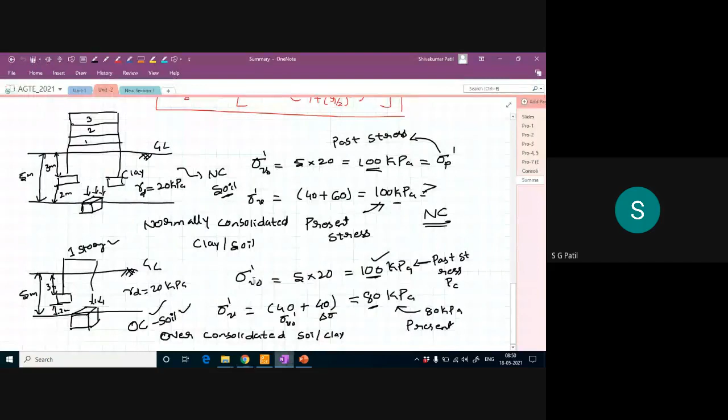So before solving, I want to summarize this consolidation settlement. So I will add here: summary of consolidation settlement. So yesterday, what we saw to calculate this consolidation settlement, what are the things we need?

First and foremost thing is you should have these compressibility parameters. Once you have compressibility parameters, then I can calculate this consolidation settlement. So wait a minute. So first we have seen these compressibility parameters.

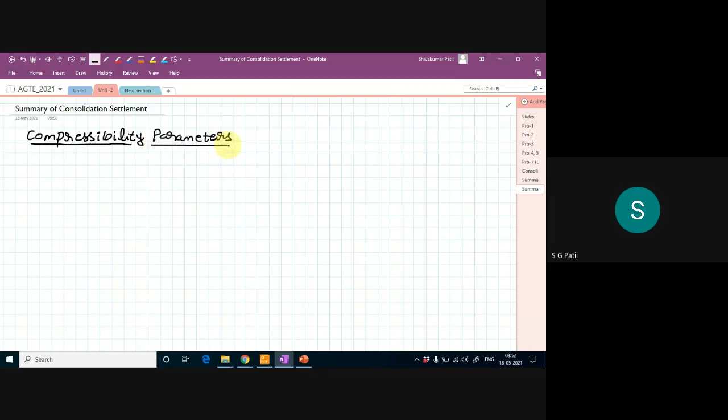Compressibility parameters. What are those compressibility parameters? Can anybody tell me? First one is your coefficient of compressibility.

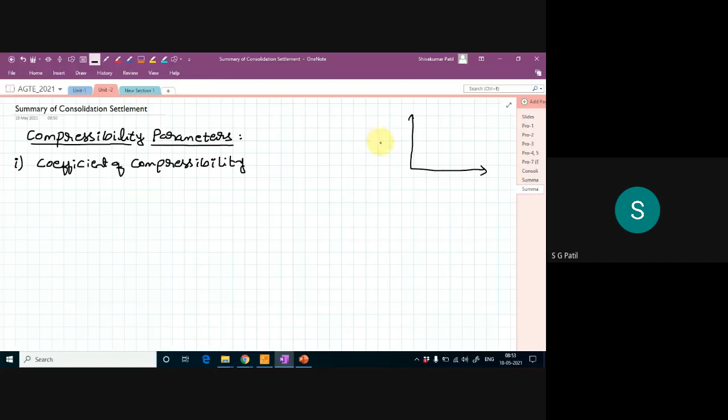So how we found out this coefficient of compressibility? If you draw a graph between your void ratio, that is E, versus your effective stress, if you plot a graph between void ratio versus effective stress, I will get something like this curve. So the slope of this virgin compression line will be my AV. So AV is equal to, what is the formula? Delta E by delta sigma dash, that is change in void ratio with respect to change in effective stress.

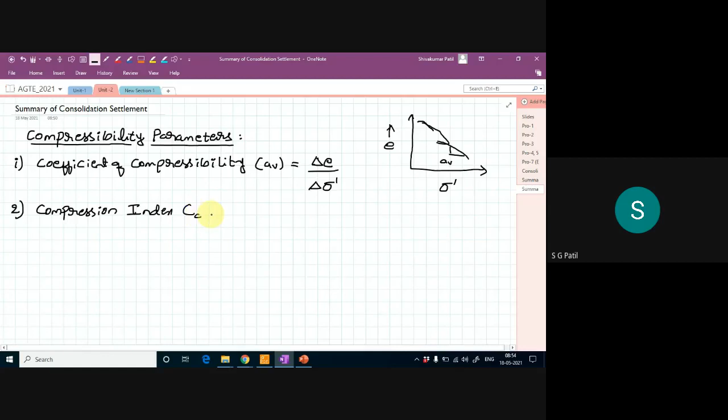So then what is the second parameter we have seen? Compression index, that is CC. How we got this CC value? If I plot the same E versus sigma plot but in logarithmic scale, so this is E and log of sigma dash, okay, now this whatever curving nature is there becomes a straight line like this.

So the slope of this line, virgin compression line, is the CC value. This CC is nothing but the change in void ratio divided by the change in effective stress, logarithmic scale in terms of logarithm, so log of sigma 2 dash by sigma 1 dash. So this is compression index. Then what is the third term?

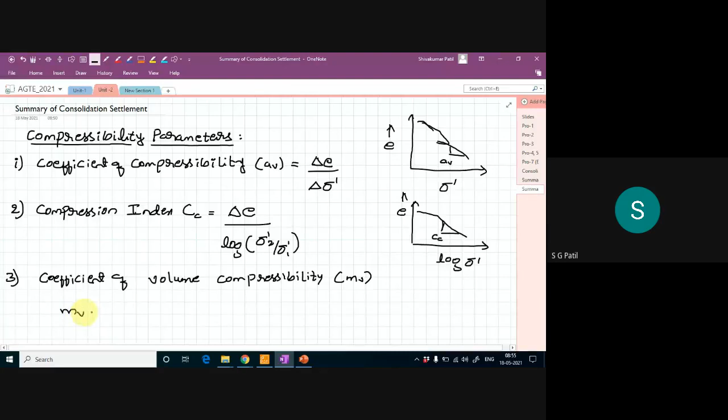Coefficient of volume compressibility. What is the symbol? Coefficient of volume compressibility, it is MV, right? So your MV is equal to what? Your volumetric strain divided by change in stress, change in effective stress. Very good. So change in effective stress.

So that is nothing but your delta V divided by V, which is your volumetric strain, divided by delta sigma dash, which is my change in effective stress. So this can be written in terms of unit height also, because since I am considering it as 1D consolidation, your volume changes in only one direction, that is H direction, because other two dimensions are unit. So that is delta H by H divided by delta sigma.

So I have a relation between your coefficient of volume compressibility and coefficient of compressibility. What is that? So my MV also can be written as AV divided by 1 plus E naught. This also I can write.

And what is the fourth parameter we have seen? What is that? Coefficient of recompression, yes, recompression index. Coefficient of, or only recompression index also you can write. Recompression index.

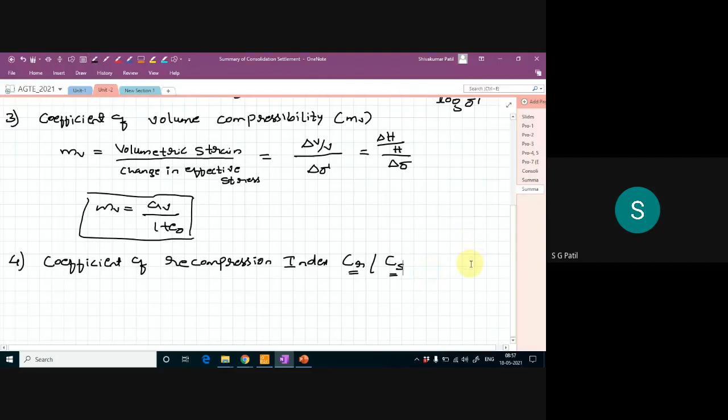So what is the symbol? CR, or in some textbooks CS, coefficient of swelling index - the recompression index, CR or CS, whatever you want. This is nothing but the slope of the recompression line. This is the recompression line and this is the virgin compression line. If I take the slope of this line, then this is my CR, which is delta E by log of sigma 2 dash by sigma 1 dash, but it should be taken in the range of the recompression line.

So whenever I am talking about compression index, you should take it in the VCL, the virgin compression line. This is the recompression line.

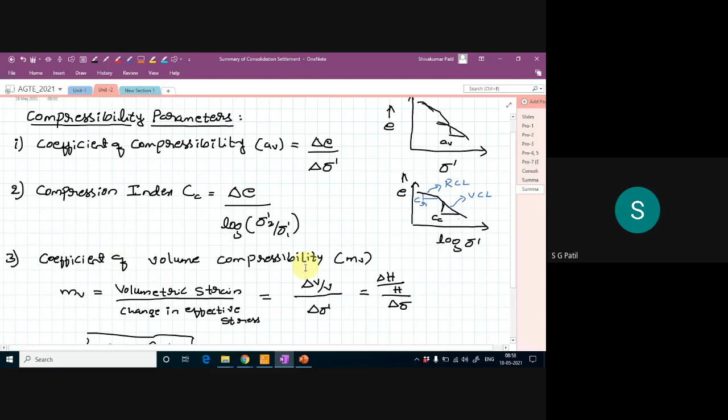Once I have all these compression indexes, the next thing is I should know whether the soil is normally consolidated or over consolidated. So some important terminologies I should remember. What is the first one?

Normally consolidated clay or soil. What is the abbreviation? NC. Can anyone tell me what is normally consolidated soil? If the OCR is equal to 1, then I can call it normally consolidated. This is one way of defining normally consolidated.

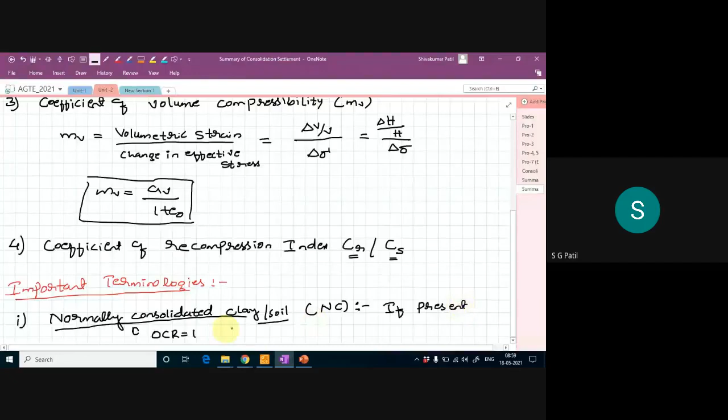But what is the other way? If the present effective overburden stress is the maximum pressure that soil has been subjected to in its geological history - that means whatever present load is there, that itself is the maximum pressure it has ever seen - those kinds of soils are called normally consolidated soil.

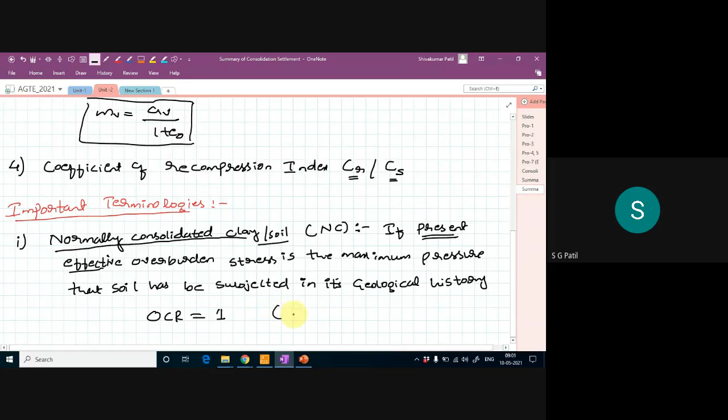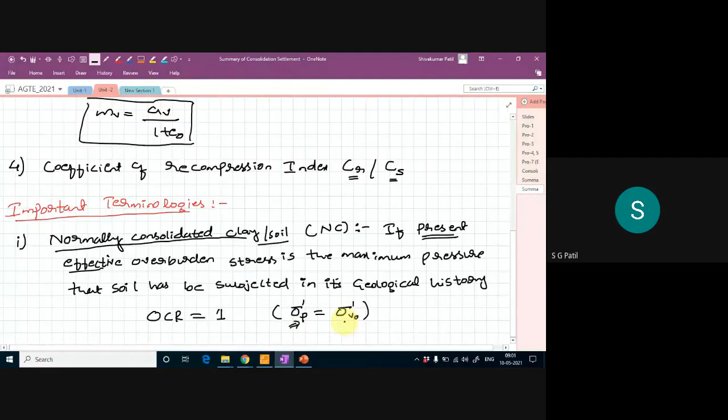So if I want to define it in terms of over consolidation ratio, OCR, then if my OCR is equal to 1, the soil is called normally consolidated. This is nothing but pre-consolidation stress equal to present vertical stress. If that is the case, then the soil can be called normally consolidated soil.

These normally consolidated soils undergo relatively larger settlement. Why am I using the term relatively? It is relative compared to the OC soil. So what is the second definition? That is over consolidated soil.

Over consolidated soil, symbol OC soil. How can I define over consolidated soil? Tell me.

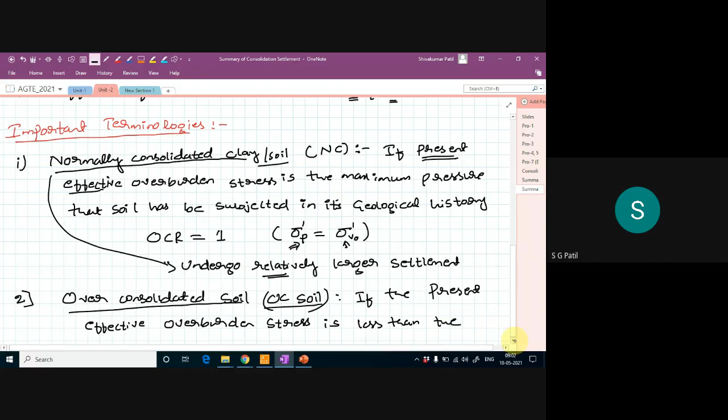If the present effective overburden stress is less than the stress which the soil experienced in its past geological history - if I want to define it in terms of OCR ratio, OCR is greater than 1 - then also I can call this over consolidated soil.

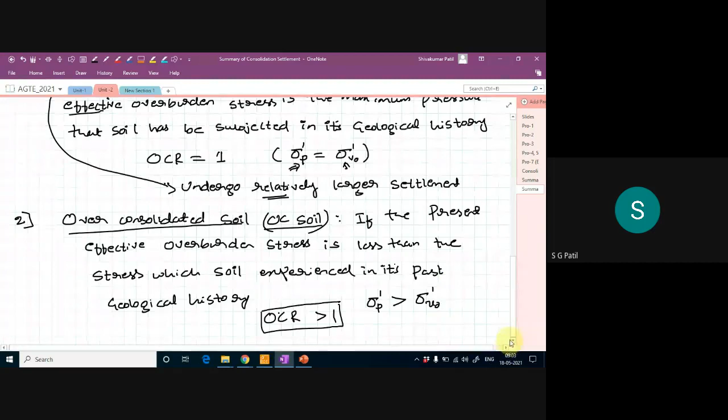That means your pre-consolidation stress is greater than your present vertical stress. Now what is OCR? OCR is nothing but the ratio of pre-consolidation stress to the present vertical stress.

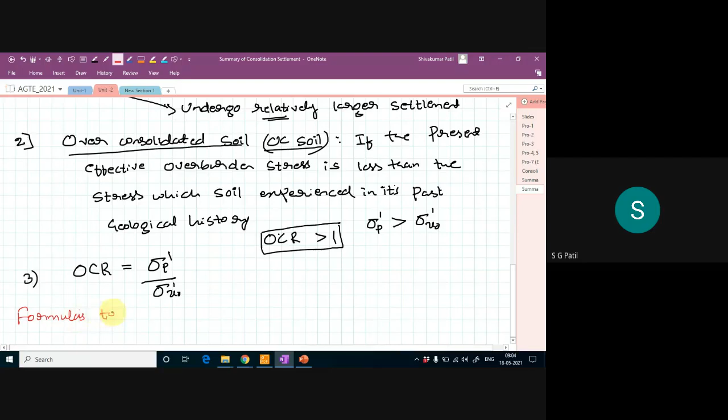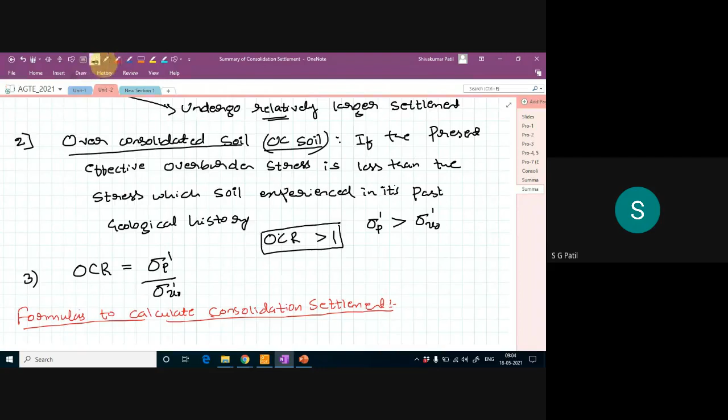So then we have seen some formulas to calculate this consolidation settlement. What is the basic formula? First, tell me. That is delta H by H naught is equal to delta E by 1 plus E naught.

So delta H is nothing but my consolidation settlement, SC. So SC is equal to H naught divided by 1 plus E naught, into delta E. This is the first equation which I can use to calculate the consolidation settlement. What is the second equation?

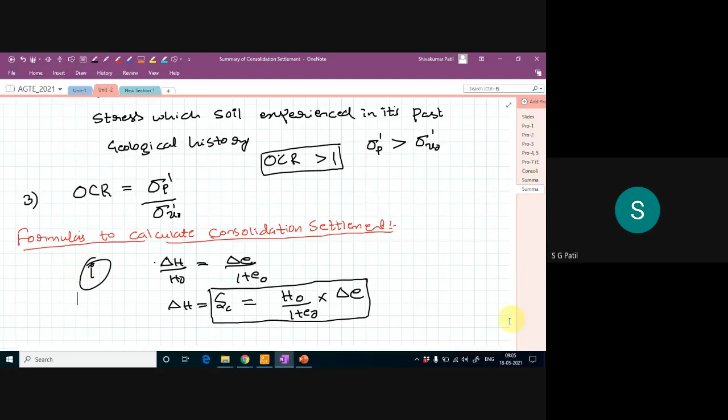So I can use AV. What is AV? AV is nothing but coefficient of compressibility. What after all is AV? AV is nothing but change in void's ratio to the change in effective stress.

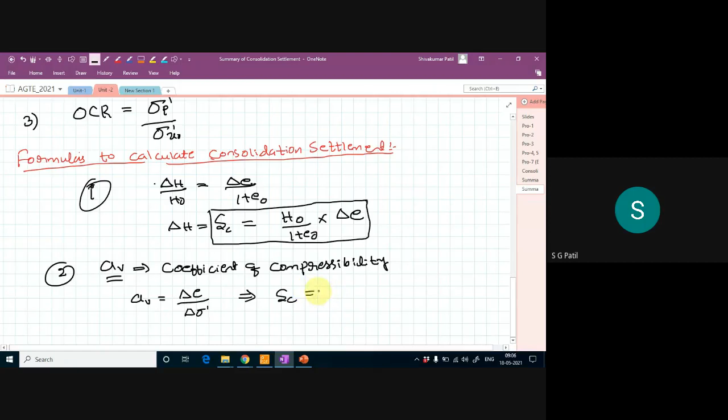Now you put this equation here - wherever delta E is there, you put AV into delta sigma. So my SC becomes AV divided by 1 plus E naught, into delta sigma dash, into H naught. This is my second formula. If in the problem they give the AV value, then you should use this equation.

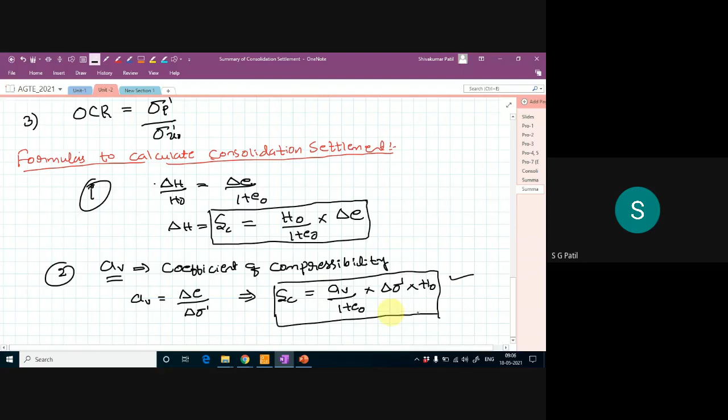Then there is another formula using MV. What is MV? MV is nothing but coefficient of volume compressibility. MV is equal to AV divided by 1 plus E naught - you put it in this equation, so AV by 1 plus E naught is nothing but my MV. So SC is MV into delta sigma dash, into H naught. This is my third equation to calculate consolidation settlement. If in the problem they give you the volume compressibility, you should use this equation.

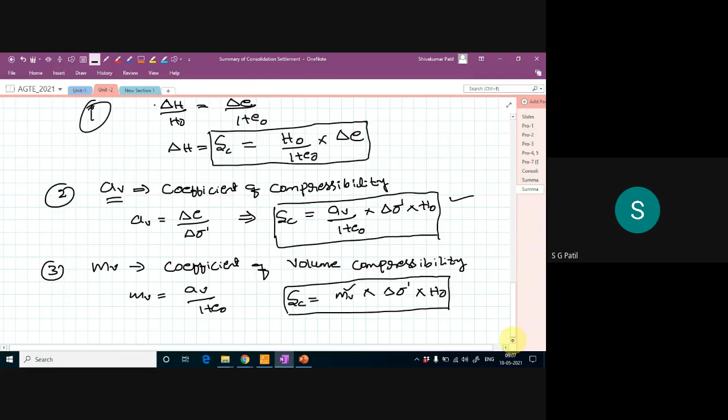Now, what is the fourth way to calculate the consolidation settlement? By using the compression index, that is CC.

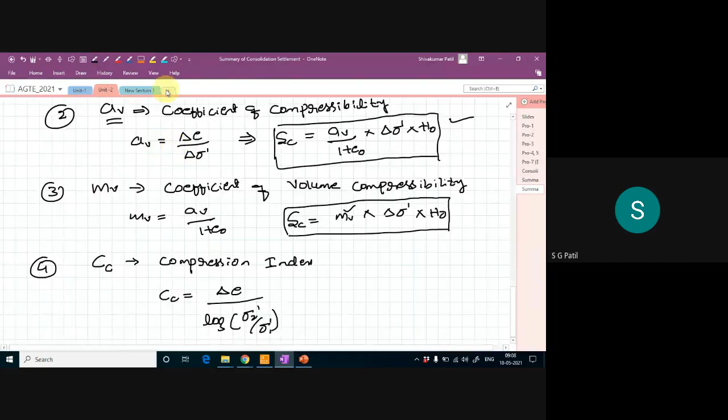Compression index. So what is CC? CC is nothing but delta E divided by log of sigma 2 dash by sigma 1 dash. Now if I put this delta E into this equation, in place of delta E, if I put Cc into log of sigma 2 by sigma 1 dash, then I will get the fourth equation.

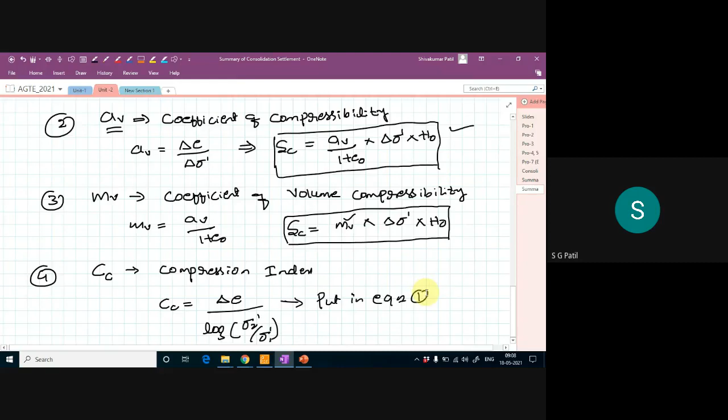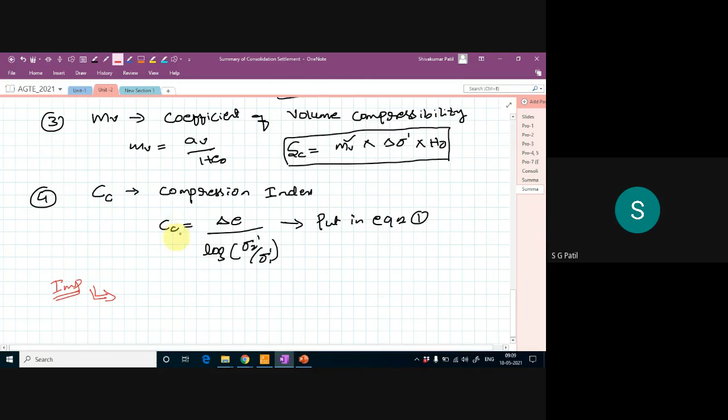So let me put this in equation number 1. If you put this in, then I will get the formula. This is a very important formula, so I will write it in red. Almost 99% of problems will be asked based on giving you the CC value. So if you forget other formulas, that is fine, but you should not forget this one.

This is very important. So Sc is equal to H naught divided by 1 plus e naught into Cc into log of sigma 2 dash by sigma 1 dash.

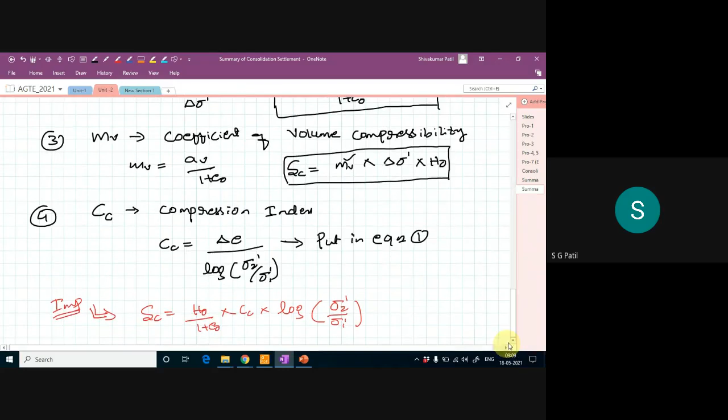What is sigma 1 dash? Sigma 1 dash is nothing but your sigma V naught, that is the present vertical stress. So H naught is the thickness of the clay layer.

And sigma 2 dash is nothing but your present vertical stress plus change in effective stress, that is delta sigma Z. This is the change in effective stress because of your foundation. Anyway, sigma V naught is nothing but your present vertical or overburden stress, or present effective stress also I can call that.

So this is an important formula, you should remember always.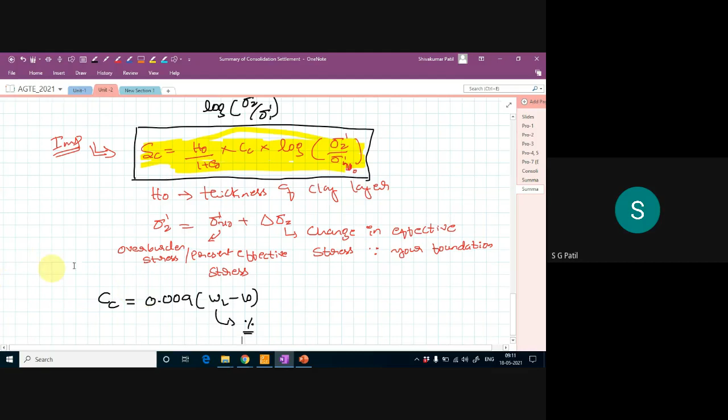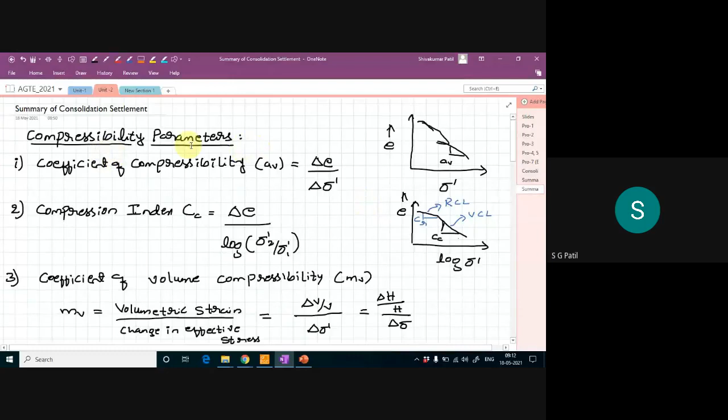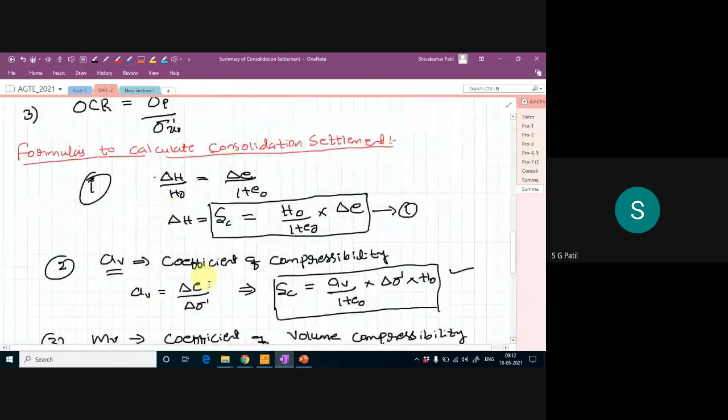So this is what we have seen till now in our consolidation settlement chapter. The important takeaway from this discussion is the definitions of these compressibility parameters, then what is NC, what is OC, and what is OCR, and how to calculate the consolidation settlement. There are 4 ways to calculate consolidation settlement, but this 4th one is very important, almost 99% of your problems are based on this formula.

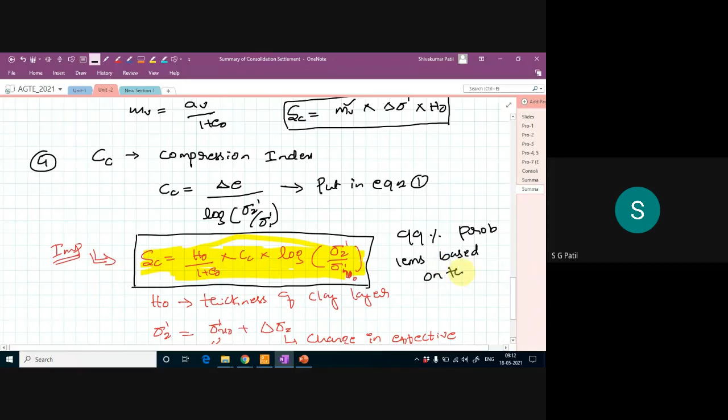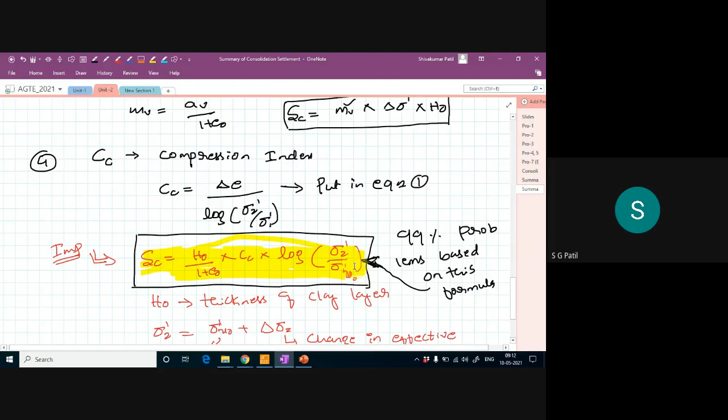Okay, so coming back to that problem I was talking about, let me solve this problem.

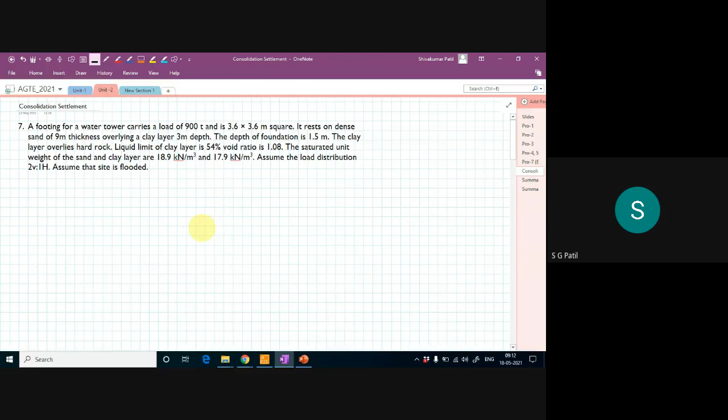So what they're telling: a footing of a water tower carries around 900 tonnes, 3.6 meter by 3.6 meter square. It rests on dense sand of 9 meter thickness overlying a clay layer. So dense sand is overlying the clay layer. This is my foundation.

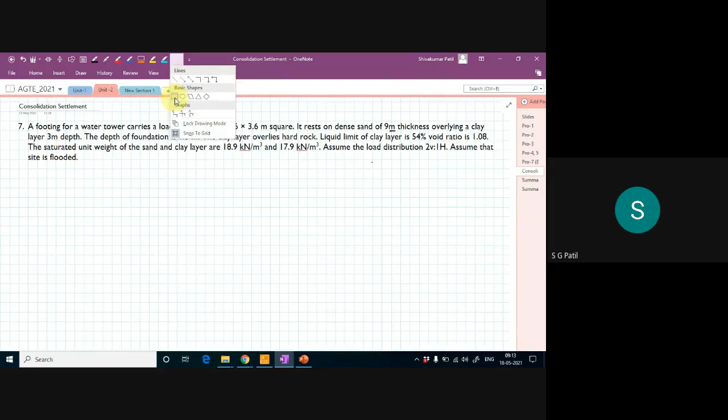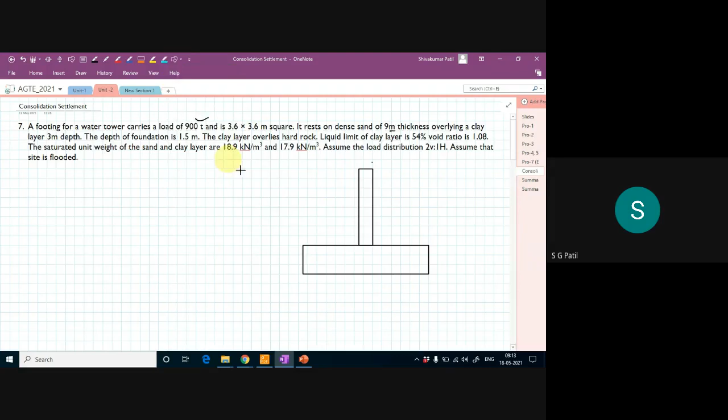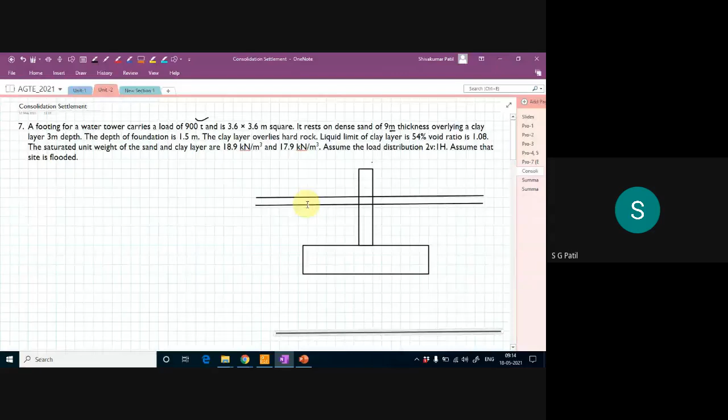This is my ground level.

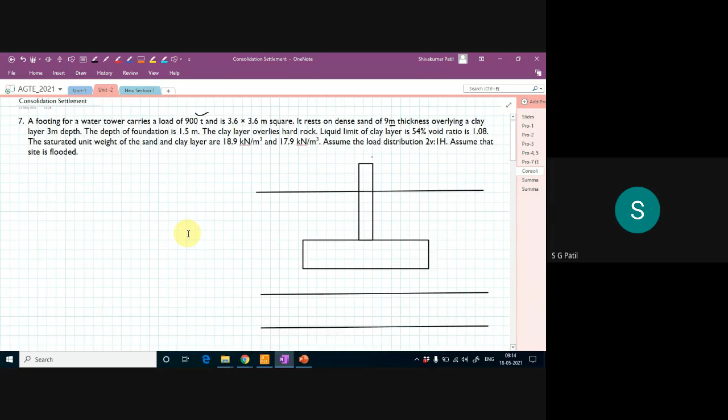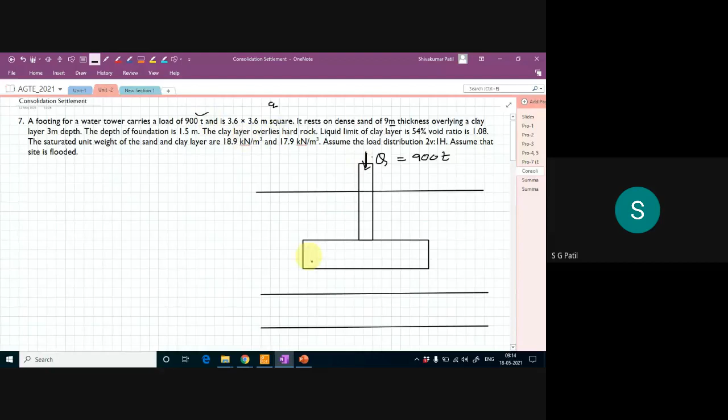So how much load is applied? That is capital Q. See, they've given it in terms of weight, not stress. If they had given it in terms of stress, that would be a small q. Here they've given weight, so capital Q is equal to 900 ton, and the size of the footing is 3.6 by 3.6 meter.

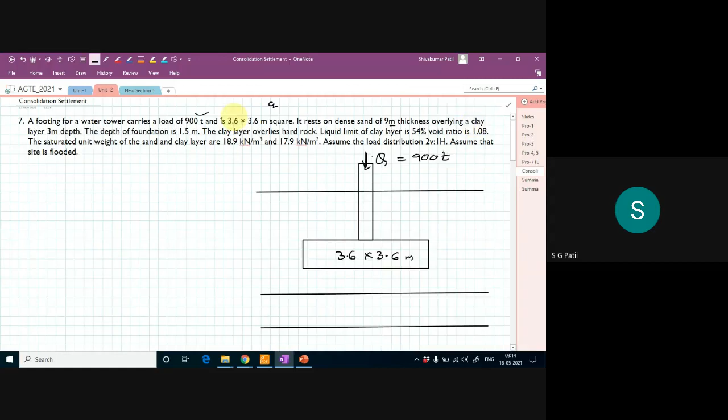So it rests on dense sand of 9 meter thickness overlying a clay layer of 3 meter depth. So this is the clay layer, with a depth of 3 meter. And the thickness of the sand layer is 9 meter thick.

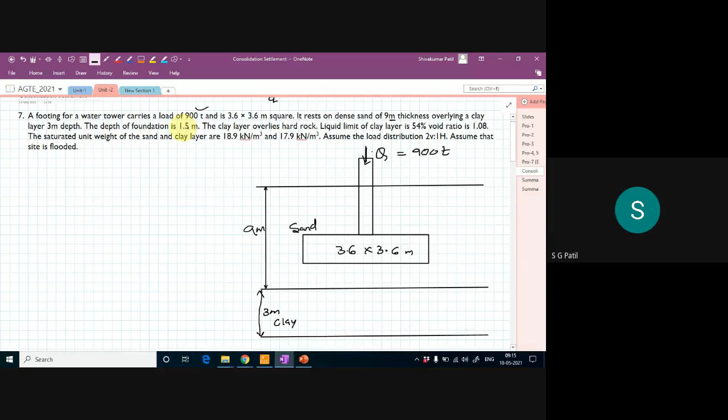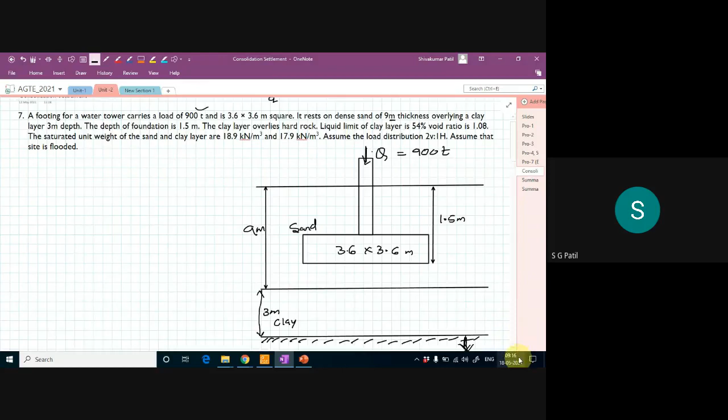The depth of foundation is 1.5 meter. The clay layer overlies the hard rock, so here there is a hard rock.

So the liquid limit of clay is 54%, sometimes I will write LL, which is nothing but your WL. The void ratio is how much? That is the initial void ratio only, 1.08. The saturated unit weights of sand and clay are given, and the groundwater table is here.

So gamma sat of sand layer is 18.9 kilonewton per meter cube. And what is the unit weight of the clay layer? That is 17.9 kilonewton per meter cube. So this is where I should write it, gamma sat, how much?

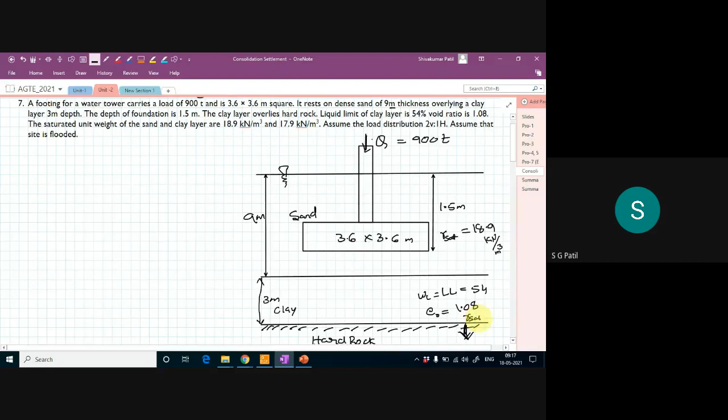Gamma sat of clay is 17.9 kilonewton per meter cube. Assume the load distribution is 2 vertical to 1 horizontal, and assume that the site is flooded, meaning the groundwater table is at the ground level. So this is my ground level. Now let us solve this problem.

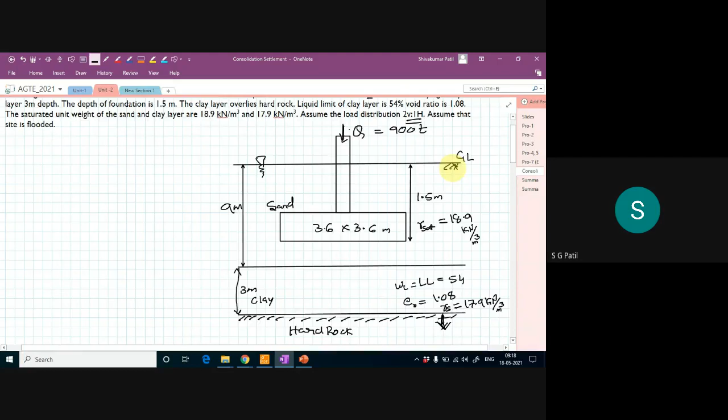How can we start? First write down the formula we should use to find the consolidation settlement. SC is equal to H naught divided by 1 plus E naught, into CC, into log of sigma 2 dash by sigma V naught dash.

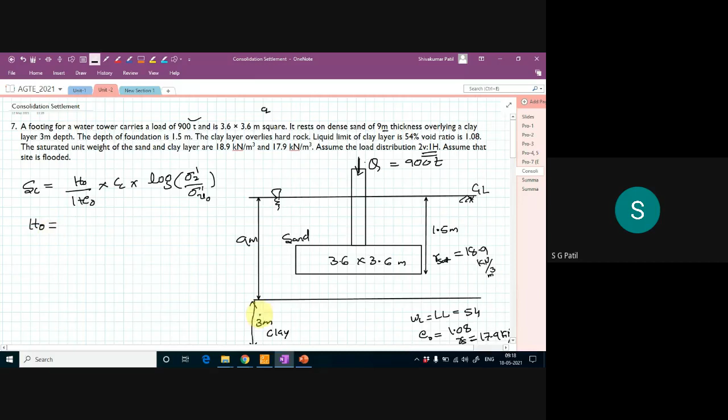So what is my H naught here? What is the thickness of the clay layer? 3 meter, so H naught is 3 meter. And what is my E naught? They've given E naught equal to 1.08. And what is CC? CC I should find out.

CC is equal to 0.009 into liquid limit minus 10. What is the liquid limit given? 54%. 54 minus 10, how much? CC, how much are you getting? 39.6, so 0.396.

You should put it in percentage only. Don't convert it into decimal, because this formula is given by Skempton, a scientist. He has given this formula using the liquid limit in percentage only. So that's why I should put my liquid limit in percentage. So this is my CC value.

So this I got, this I got, this I got. Then what is my sigma 2? Before that, I will calculate sigma V naught dash at the center of the clay layer. Let me draw a center line here.

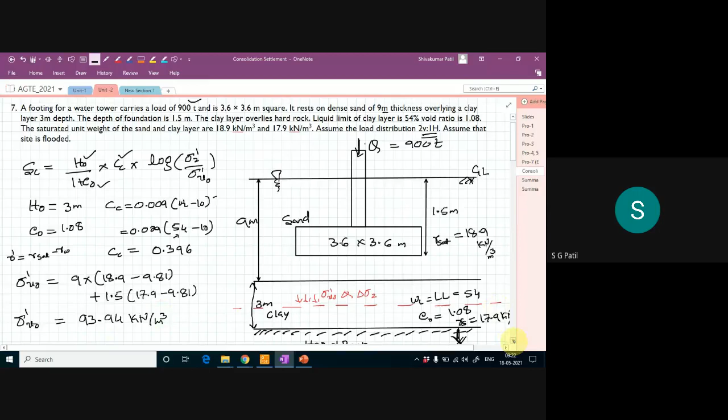Tell me how much you are getting for sigma V naught dash. 93.94 kilonewton per meter cube. Okay, very good.

So next, what next? I have to calculate this sigma. Sigma 1 dash is nothing but sigma V naught dash plus delta sigma. Now I have to calculate this delta sigma.

How can I calculate it? Using the 2:1 method. So delta sigma z can be calculated using the 2:1 method. The z value is this one, the vertical distance between your footing and the middle of the clay layer.

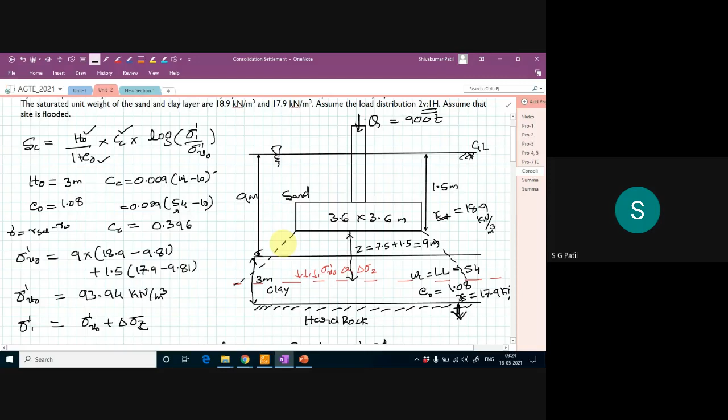So in this 9 meter, I have to deduct 1.5, giving 7.5. 7.5 plus this 1.5 again gives 9. So z is equal to 7.5 plus 1.5, which is equal to 9 meter. So the distribution will be there like this.

This distribution is 2:1. Let me draw a rough figure here. This is my foundation, of size 3.6 by 3.6. This here was my center of the clay layer. So what was my z value here? My z value was 9 meter. So this is how the distribution of the load will be there. What is this distance?

My width of the footing is 3.6. Here the distribution of the load is 2:1, that means for 2 vertical there is 1 horizontal.

So now for Z vertical, Z is my 9 meter. For 9 meter vertical, what is my horizontal distance? So 9/2, right? So 4.5. This total distance...

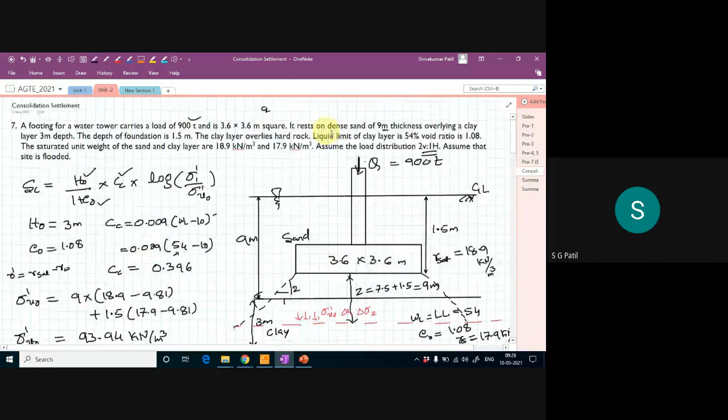So what is q here? How much load did they tell? 900. Put it in terms of newtons. So 900 ton, it is in ton. To convert ton to kilonewton, I have to multiply by 9.81.

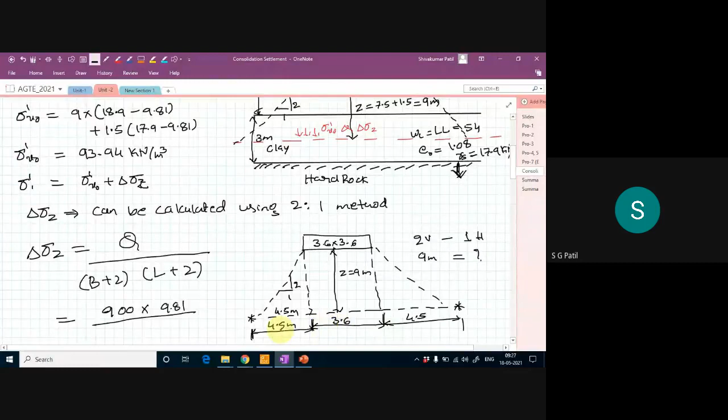Divided by B plus Z. What is B plus Z? 3.6 plus 4.5 plus 4.5. So that is nothing but...

12.6 into, so my L is also 3.6. This side also my L, L is also 3.6. So that is 3.6 plus 4.5 plus 4.5 again, so that is 12.6.

So tell me how much you are getting delta sigma z. So delta sigma z is equal to 55.61 kilonewton per meter square.

Now you put everything you got. You know delta sigma z, and you know sigma v naught, you know everything. So simply now, this value you should put in the equation. This is my delta sigma z, delta sigma z is here. This also I should put it in my equation.

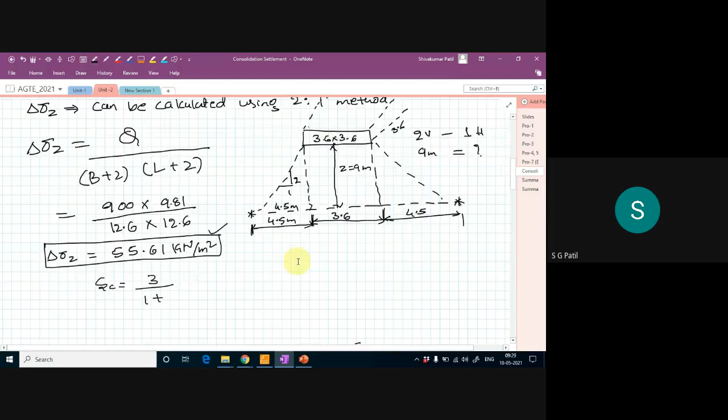So SC is equal to H naught by 1 plus E naught. H naught is how much? H naught is 3 meter, no? So 3 divided by 1 plus E naught. What is E naught? E naught is 1.08. So 1.08 into CC. CC, how much we calculated?

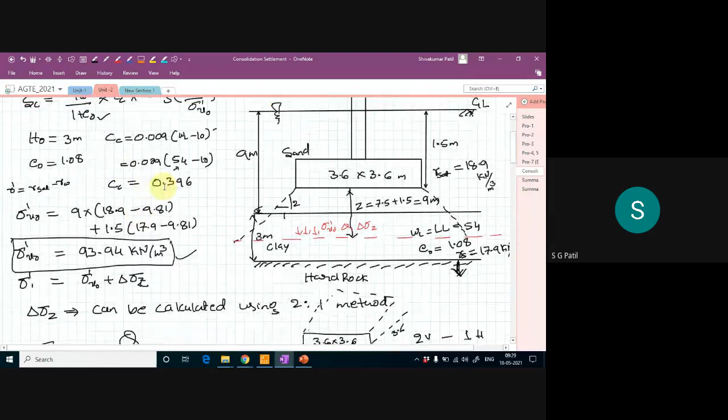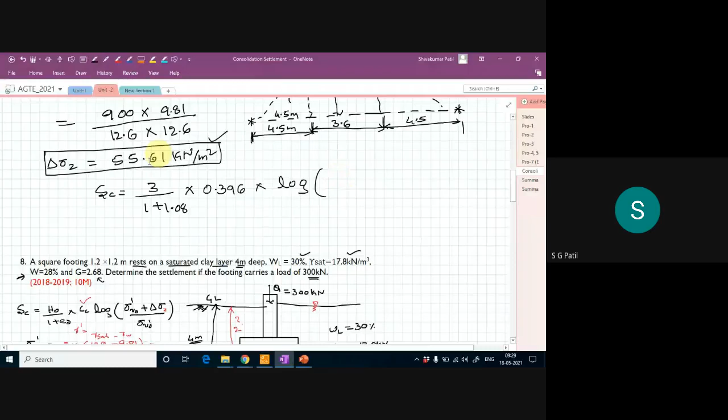How much we got CC? 0.396. So 0.396 into log of sigma v naught. Sigma v naught, how much? 93.94.

So 93.94 plus my delta sigma z is 55.61, divided by sigma v naught, 93.94.

So tell me how much you are getting. SC is equal to 0.1153. So this is my answer.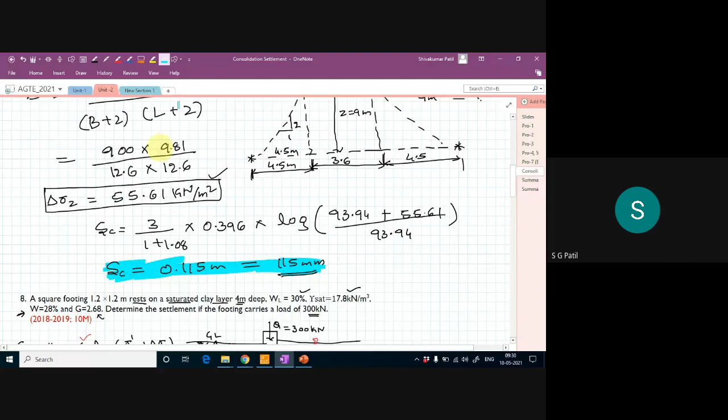Any doubt here in this problem? Yes. Any doubts? Rohit? Yes sir, have you understood the problem? Yes. Any doubts are there? No sir, okay.

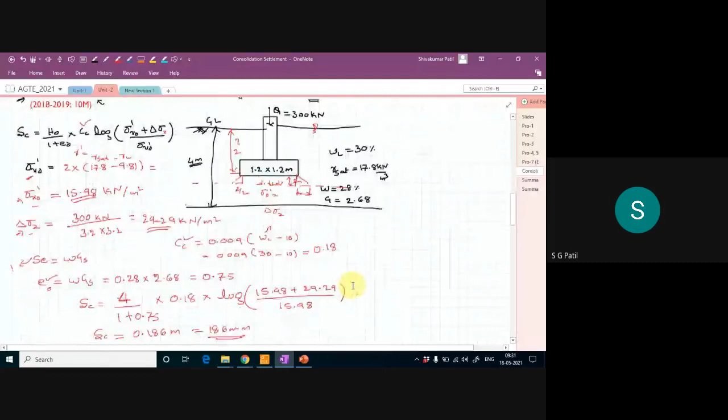Here there is another problem. So this you solve it on your own. This I won't solve it. This you have to solve on your own, and this will be the part of your assignment question also. So this I will put it in assignment.

So answer I will write here. So you should get consolidation settlement. So SC is equal to 0.48 meter.

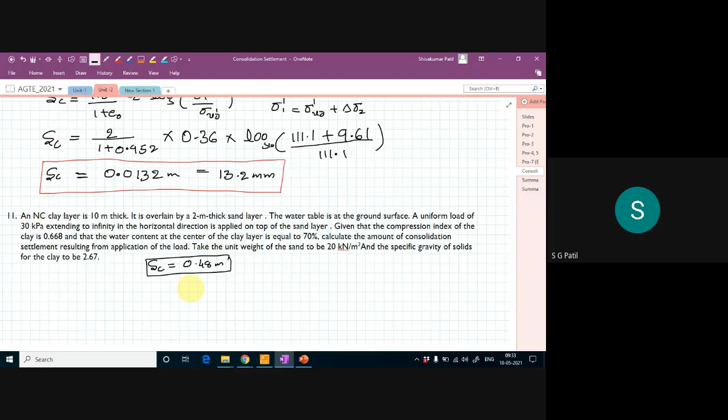So this is what I planned today. There is a very small portion left, which I will cover tomorrow. So till now, we have calculated the consolidation settlement for normally consolidated clay. If you have an over consolidated clay, how to solve? We'll see that in tomorrow's class.

But I want to remind you that whatever questions are asked in exams are all based on normally consolidated clay only, they never ask over consolidated clay. But to be on the safer side, I will take one over consolidated problem and we will solve that tomorrow. So I will stop recording here.